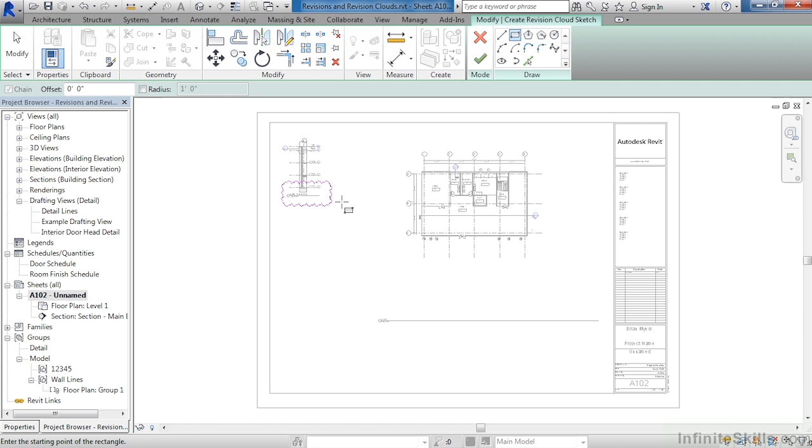If we now look at our properties, we can see that this revision is Revision 1. In fact, it has the number Revision 1 right underneath it here in Properties, and the date that will show up in the revision is called Date 1. In just a moment, I'll show you where that information can be updated and changed.

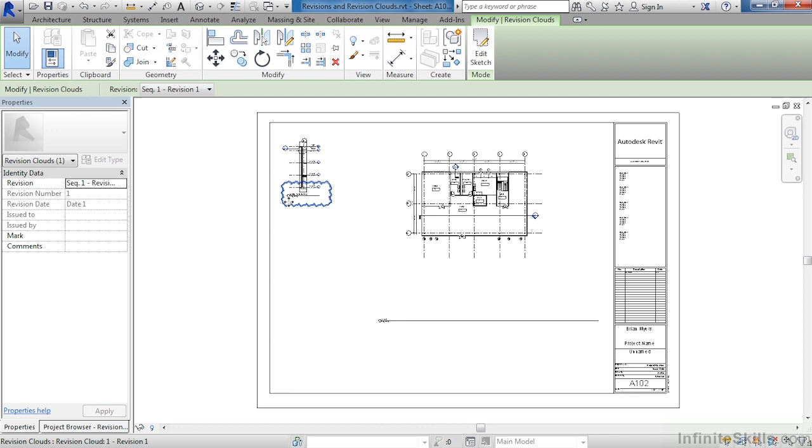Move your cursor up and select on the big green check mark. We now have that revision cloud in place. If we look on our title block, we can see that the revision is now inside of the title block. To modify this information, come up to the Manage tab and select Additional Settings.

Then pick Sheet Issues Revisions. This is where all that information related to the revisions is located. Currently, it's numeric as opposed to alphabetic. The date is called Date 1, and revision is Revision 1.

If we needed to change this to alphabetic instead, we could by clicking where it has numeric, then selecting alphabetic off of the list. The Date 1 and Revision 1, if we wanted to put in today's date, as well as some sort of revision information, we could do that here. We will talk about the rest of this just a little bit later.

But another thing I would like to do is add yet another revision to this information. To add a new revision, just come up and select the big Add button in the upper right-hand corner. This will add Revision 2. This can also be either alphabetic or numeric, and can have its own information associated with it.

Come down to OK. You will notice that even though we've added a second revision, it does not show up here inside of the title block. The reason is that revision information is associated with the revision cloud. Since there are no revision clouds, either inside of a view that would be on the sheet or on the sheet itself, there's no revision information showing up inside of the title block.

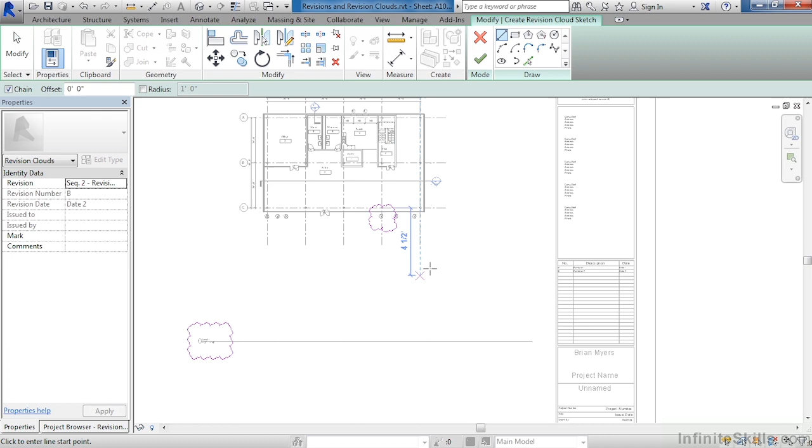And let's also have a second revision, but this time let's use one of our other drawing tools. I don't care if it's the circle or the polygon or which one that you use, but in this case I will be using the line tool. I will manually draw in the shape that I want this to be, then click on the big green check mark. By doing this, both of these are associated with Revision 2.

If we look in the title block, we can see that Revision 2 is now there in the title block, and this is the letter B. Come up to the Manage tab, select on Additional Settings, then go to your Sheet Issues and Revisions to see its properties. A couple of other properties available here underneath Sheet Issues and Revisions include Issued and Show.

Issued means that if issued is checkmarked, no other revisions can then be used that are revision number 1 because this has already been issued. Where it says Show, Cloud and Tag, make this be None. This means that the cloud and then the tag that we would eventually put in would not show up. Move down here to OK.

Zoom out, and you will notice that Revision 1 no longer shows up because in that previous dialog box, we told it not to show up. If we need to tag our revision clouds, we can do that as well.

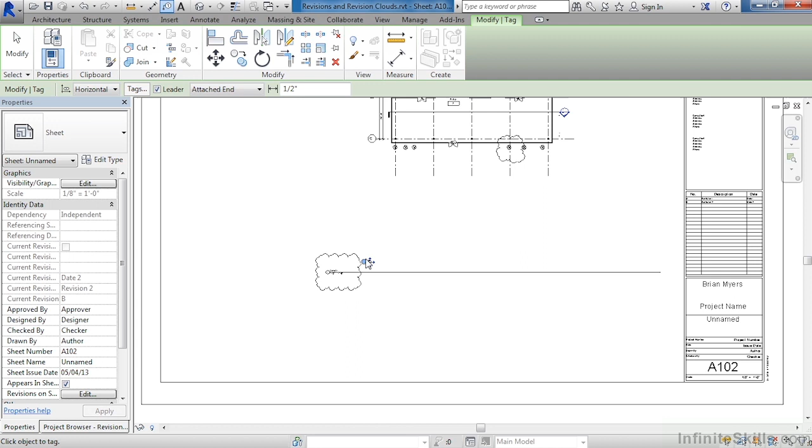Just come over to the Annotate tab, Tag by Category, click the revision cloud. By doing that, we can now see that this is revision B, which of course corresponds with the information that we have over here.

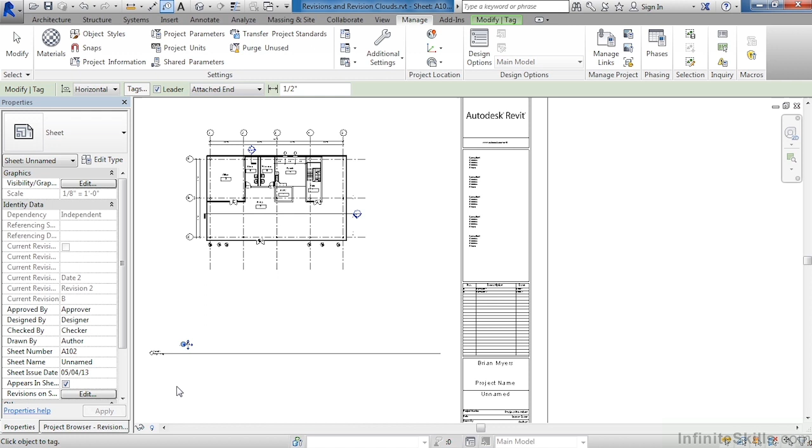If we go back to the Manage tab, once again come down here to Additional Settings, Sheet Issues and Revisions, we can see that Cloud and Tag is the option, and that's the reason why we can still see it. It's still turned on. If we decide to only show the tag and not the cloud, we could then click on OK one more time, and now we can see down here that all that's left is the tag.

And if we need to turn that leader off, because right now it's not pointing at anything, make sure to select on the tag, come up to leader, and now you will see that that leader goes away, the leader that had been pointing to the original revision cloud.